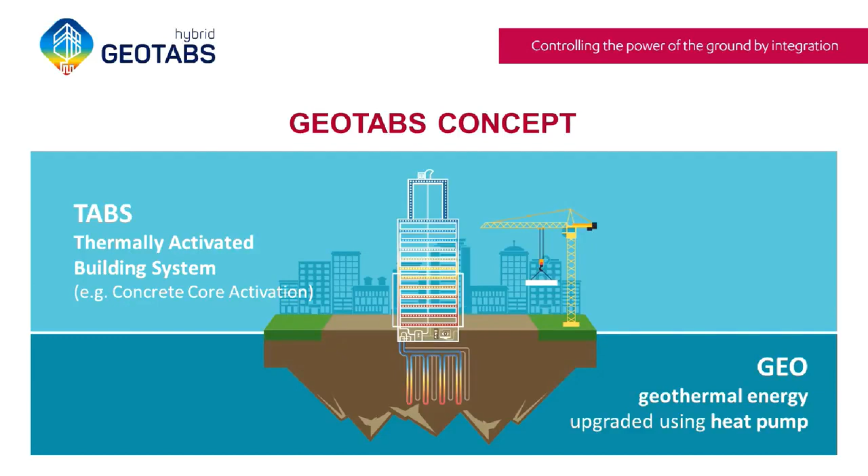To go a bit more in detail: at the moment there is heating demand in the building, cold heat will be taken from the underground, which is at a more or less stable temperature, and using a heat pump it will be upgraded to a higher temperature in order to heat the building at temperatures very close to comfort level, so temperatures between about 25 and 35 degrees.

In other moments, like in summertime when cooling is needed, the temperatures underground, being for example around 17 degrees, can be integrated into the building in a passive way, or if needed, active cooling can be introduced to lower the temperatures even further. But usually with passive cooling we can already do quite a lot.

The technology allows for seasonal storage of heat or cold into the ground, in which the ground serves as a heat source and/or heat sink. So in the winter, the cold is stored in the ground, which is then used in the summer. During summertime, the heat from the building is again stored in the ground to be used in wintertime.

The geoTABS technology already exists for quite some time and has quite some benefits. In terms of thermal comfort, for example, TABS is a radiant heating and cooling system, which is very nice for having high thermal comfort. Also, because we use the thermal mass of the building, we can store quite some heat to reduce, for example, peak loads.

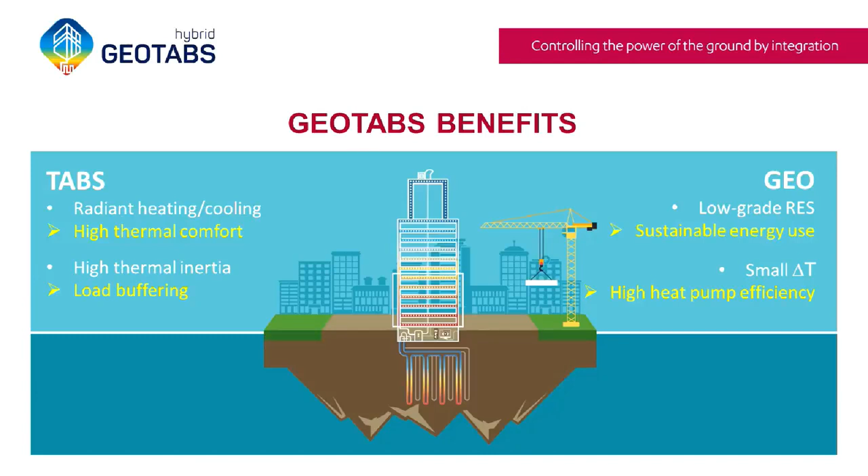However, there are of course a number of challenges, otherwise we would not be here today. Challenges with regard to the geoTABS concept. On the side of TABS, the high thermal inertia of a TABS floor makes it difficult to reach comfort in moments where there's a sudden increase in heating or cooling demand, because, for example, the sun hits the building or many people come into a room, which might suddenly increase heating or cooling demand, and which cannot always be directly covered by the TABS.

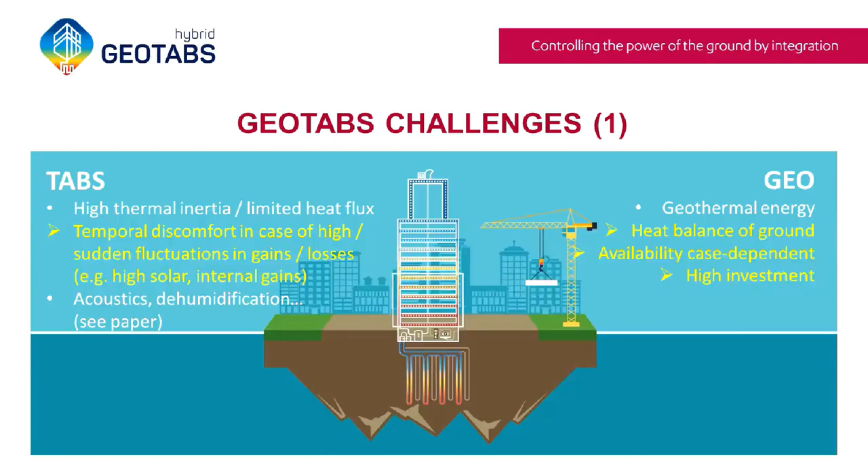A second aspect can also be with regard to acoustics or dehumidification.

On the geothermal energy part, there is of course the heat balance of the ground. In cases or buildings where there is a lot more heating or a lot more cooling demand, it's not always possible to balance the heat in the ground. So that's something that should be further looked at, and can also limit the number of cases in which geoTABS can be applied. Also, the availability of geothermal energy is case-dependent, and heat pumps are still quite a high investment.

Therefore, we have a first solution in the project, which is to combine the geoTABS with secondary systems, both on the emission side and the production side. So that is why we call the project hybrid geoTABS.

The hybrid solution in terms of emission systems can be to combine the TABS with other emission systems such as radiators, fan coil units, and so on. On the geothermal or production side, we can combine geothermal energy with classical non-renewable or with renewable resources to assist in heat production where needed.

For example, to reach a better balance in the ground every year, or to reduce investment costs, so that we can use the geoTABS at the point where it is most interesting and most efficient to use, and cover the remaining demand with, for example, less expensive energy sources.

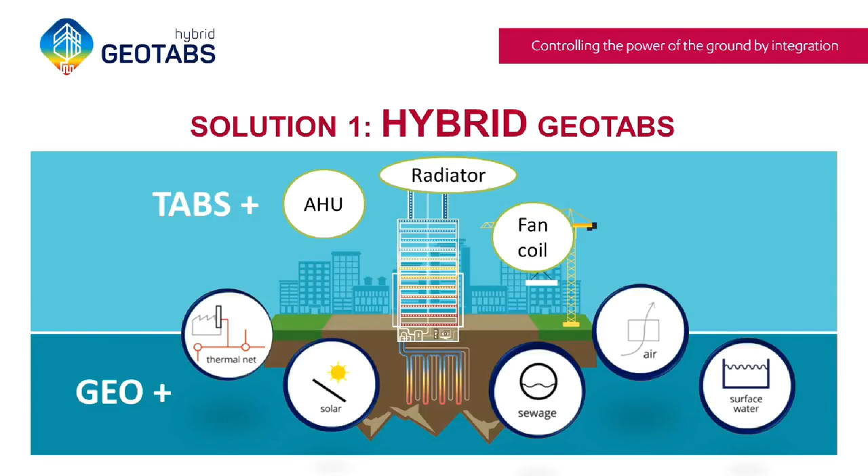Of course, this integration with secondary systems into a hybrid concept brings along a number of extra challenges. One of them is related to the control of the building, which will be the topic of the remainder of today. Traditional control of buildings is usually based on rule-based control. However, when we come into a building that is quite complicated with integration of various systems, it becomes more and more difficult and time-consuming to design and develop these controls, and to have them working decently.

On the other hand, we have the solution of using model predictive control, but also there quite some developments need to be made. But that is of course the further topic of today.

Also on the level of the design of such a building, there are still quite a number of challenges. For example, today it is often based on the personal experience of some experts who are designing these projects, these buildings. So an optimal balance between the geoTABS system and the secondary system is still a question we are working towards.

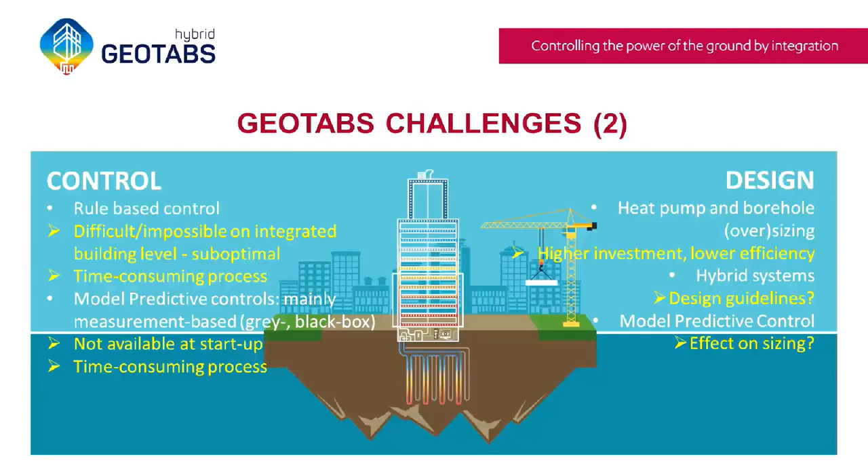Of course, the control of the building might also have an effect on the sizing of the components, so we should also take that into account. A second solution, therefore, in the project is the further development of model predictive controls to use in hybrid geoTABS buildings.

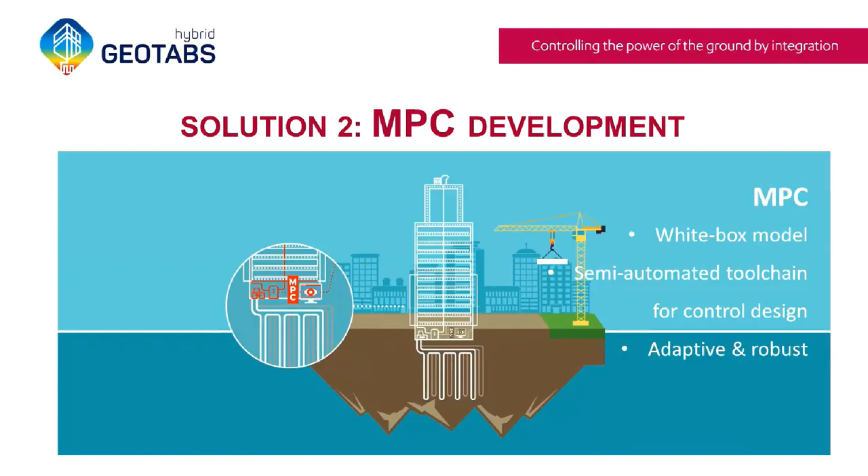A third solution is then about the integrated design of the concept, in which we take into account the geoTABS and secondary systems and also the effect of the control. The goal or aim there is to have a more optimal sizing of the concept and to provide easy-to-use guidelines or design methods that can be applied by engineers, architects, and a wider public in the future, so that we can avoid a lot of time-consuming studies with dynamic simulations and so on.

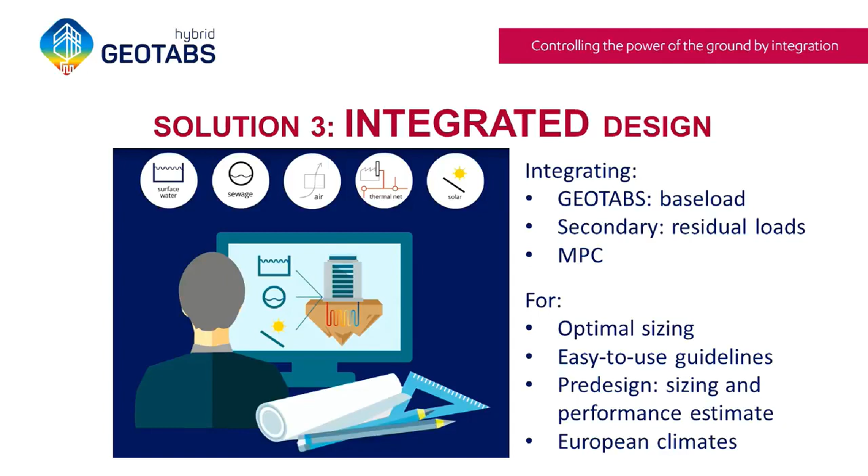So all these challenges brought a number of people together in this project, which we call Hybrid Geotabs. The long name of the project is Model Predictive Control and Innovative System Integration of Geotabs in Hybrid Low-Grade Thermal Energy Systems, so Hybrid MPC Geotabs.

In the consortium, it's quite important to mention, we have a mix of academic partners, small and medium-sized enterprise partners, and also some industrial partners.

Then we have a number of two design institutes involved: Boydens Engineering from Belgium and Lemon Consult from Switzerland. We have Geother, experienced in geothermal energy use from Spain, and two larger industrial partners being Viessmann and Uponor, who are also here today.

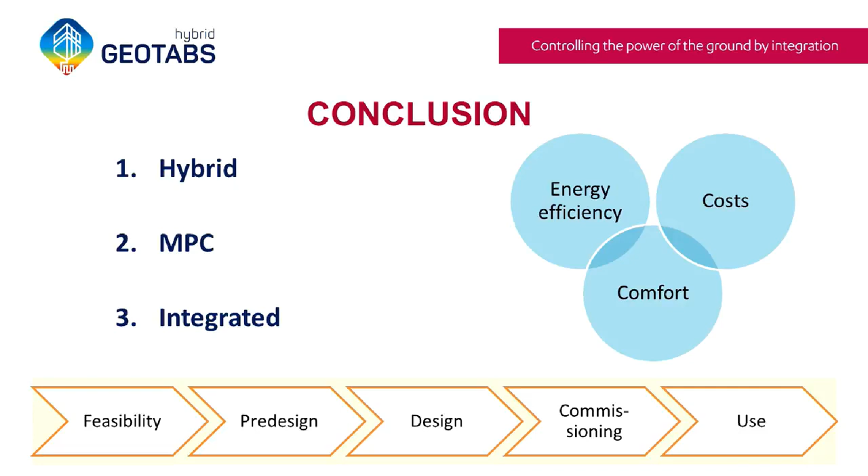And we are looking towards this in the feasibility, pre-design, design, commissioning, and use stage of the building. With this short introduction, I will give the floor to the next speaker, and via social media and our website, you can of course find much more information about the project.

Thank you very much, Eline. And...

Now is the time for Damien Picard of KU Leuven, who will give us a brief introduction on how MPC works and what it is about. Damien has been working quite a few years on MPC control now, so he's the best person here to give us the introduction to MPC. So, Damien, the floor is yours.

Thank you, I will start with putting my own presentation on. What does that mean? It's maybe already open, yeah. I should work on my slide skills, but...

Good morning, everyone. I have the pleasure today to introduce you to the concept of model predictive control. After my presentation, Philippe, Joris, and normally Jerry, but you, Jan, will give a presentation on the practical aspect, how we implement it in real buildings.

I will try to keep my presentation sufficiently short, so that you can ask whatever questions you want, but keep in mind that if you have real questions about the practical aspect of it, it's maybe better to wait for the next presentation so that you have the total view. And before I start, I would like to know who has...

...been working on designing buildings and HVAC systems in the room? And who has been working on designing control for HVAC systems and buildings? Okay.

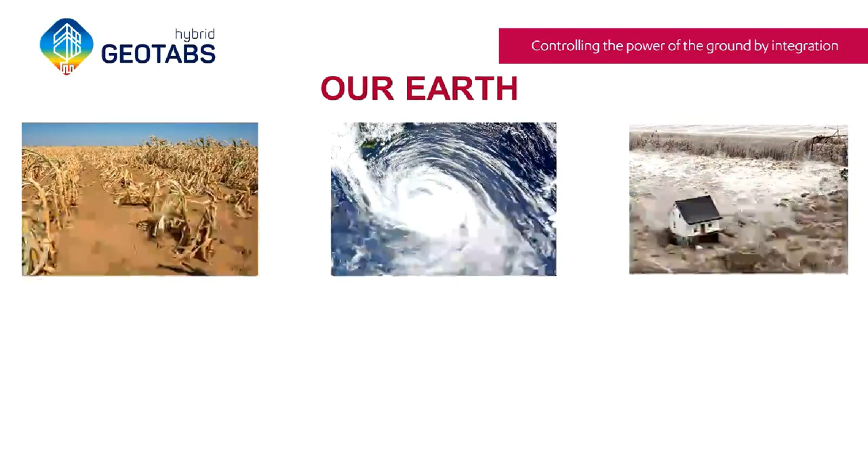I just want to show you a couple of disasters when the Earth is not reacting as we want it to. For example, if it's not raining, we have big troubles getting food. When there's a tornado or a flood, it's extremely destructive. So when Earth is not kind to us, we are in big trouble.

But the problem is that we are not very kind to the Earth either. It's a fact that global warming is happening fast, and we're facing a huge challenge to keep the temperature rise under 1.5 degrees by 2050. So politics is working on these numbers - it's pretty short time, and there's a lot of actions which need to be done and which are partially being done.

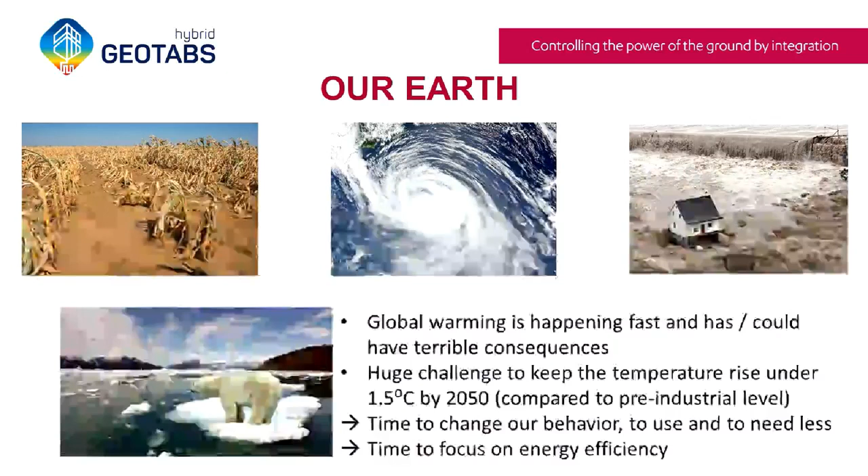So with this, as you all know, it's time to change our behavior, to change our use, to use and need less, and it's time to focus on energy efficiency.

What's quite interesting is that the building sector, as you may know, is using a tremendous amount of energy. According to the report of the International Energy Agency and International Partnership for Energy Efficiency Cooperation, the building sector uses worldwide 120 exajoules, which is about 30% of the total energy consumption of all sectors of the economy. This is a very substantial number, and it's also responsible for 30% of global CO2 emissions.

The report also makes some speculation that if we apply now the most efficient system to all existing buildings, we could save roughly 50% of the energy used by the building sector.

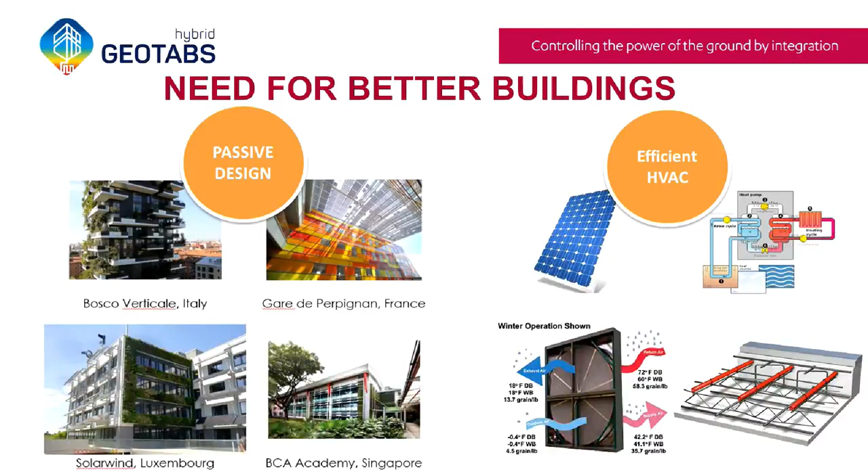While my colleague Filip Jorissen was doing his PhD, trying to model all that and implement all the rule-based control, he ended up with a book of 400 pages describing how the control works. Just because it's so complex to put all these different systems into rules and to try to optimize the way they interact, it's a very work-intensive task. You always end up with a suboptimal solution, which needs a lot of commissioning. What's also important is that it's very difficult to get a general framework that you can apply to all buildings. So you always have a lot of engineering to make it, and then a lot of engineering to commission it and tune it until you achieve good comfort and good energy.

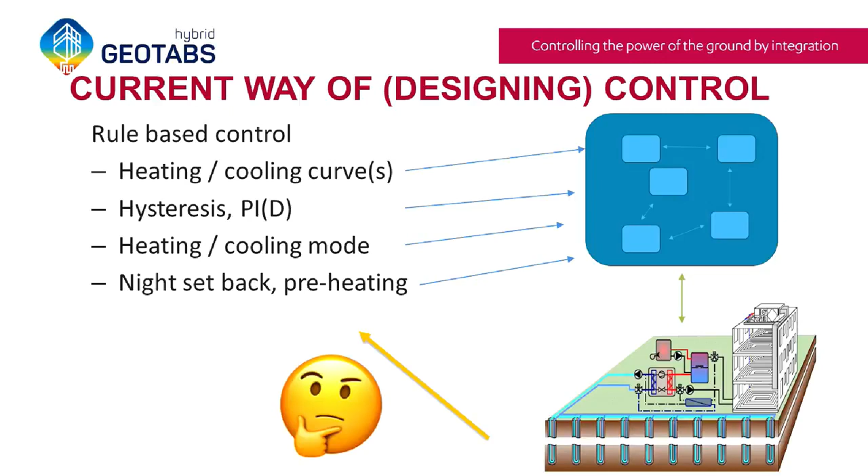So most probably the way of the future is not anymore to try to, by hand, define all the different rules and all the different interactions into software, but much more trying to create a software where we can give the general physics of the building, which type of HVAC is present in the building and which type of building it is, which type of occupancy there is, which type of schedule, which type of internal gains which are being expected, and solar gains. We put this more physical information into the software, and the software is going to automatically set up which type of control signals needs to be sent to the different machines, and the software is going to take itself into account the connections between these different systems.

There's a really upcoming technology which is now everywhere: the optimization possibilities of the computer. The computer will then have to optimize how we can get as much comfort into the building and how we can use as little energy as possible. So this project is working on this with model predictive control. And I would like to introduce more what's our vision about this and how we implement it.

When we speak about computers starting to optimize and think, a keyword everybody has heard before is artificial intelligence. This is really an upcoming technology which is also taking a role in HVAC. If you think about the Nest thermostat, for example, this is artificial intelligence, but there are a lot of other aspects. I'd like to first introduce it with the Google car example to show you the key elements of artificial intelligence, meaning in a broad scope that the computer starts thinking and optimizing in order to control a system.

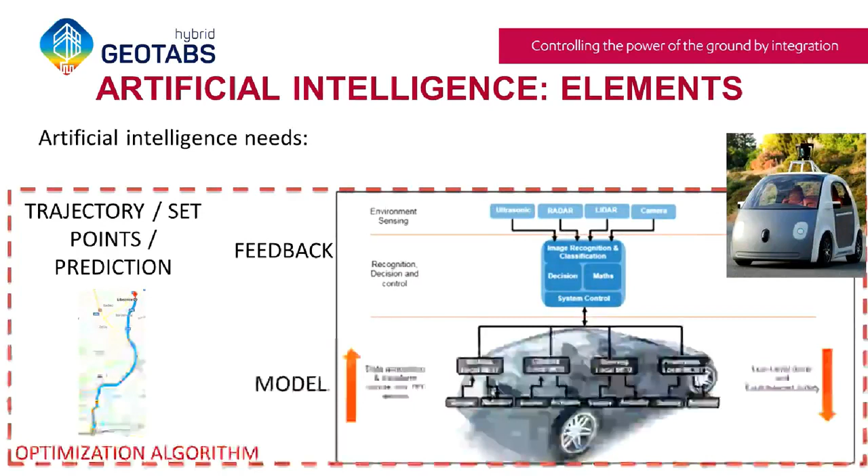All three elements — the trajectory, the model, and the feedback — are included into an optimization algorithm, which will then try to get things done as efficiently as possible. In the case of the car, that means getting from point A to point B as fast as possible, while ensuring good comfort and, mostly, ensuring security.

Let's focus a little on the model, because this is a really key element. In literature and in practice, model generation is categorized into three types. The first one is a black box model. A black box model is something where you measure the actions you put in, for example the throttle and the steer angle of the car, and you measure at the same time the resulting speed and direction, and then you create a mathematical model based on this measurement to find a connection between throttle and speed, and steer angle and direction.

So you do not need to apply any physics into this — think of it as a regression curve, for example, or another type of model. It can also be a neural network if you're really into artificial intelligence. It can be whatever. What's important is that you need measurement data of your system, and then by applying some mathematical tricks on it, you'll be able to predict more or less how your system behaves. Another way of doing it is to say, well, I have an idea how my system looks like.

So I know that I have a steering wheel, and that the throttle is connected to the engine, so there's a clear connection between speed and throttle. You put this information already into your mathematical model, and you only optimize the parameters of this model based on measurements. So let's say you have a general idea how the car is working, but your model is not yet fitted to that specific car. Then you measure throttle, steering wheel, speed, and direction, and start optimizing the parameters of the model so it fits that car. That's called a gray box approach.

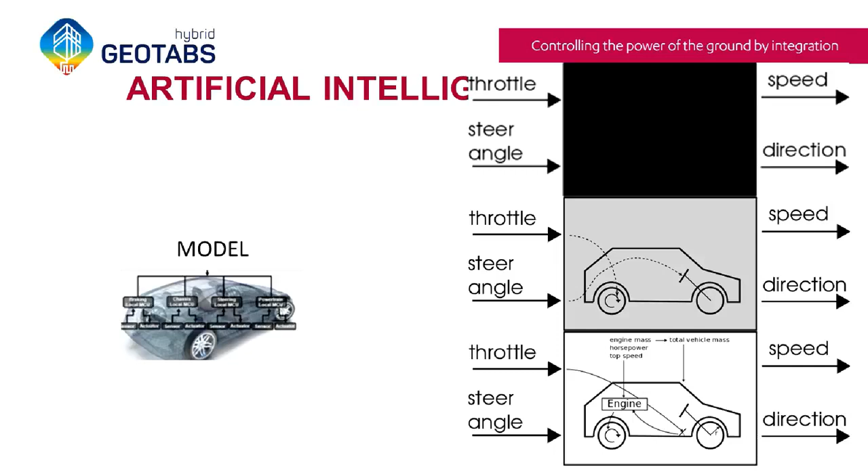Now the second aspect I want to focus on before we move to buildings is the optimization algorithm. There are some important keywords. First is objective: what you want to achieve with your optimization. For the car, I've said it's minimum time, minimum fuel, and maximum comfort. Then there's the optimization variable: what are you actually controlling? For the car, it might be the throttle, the steering wheel, brakes, and the road you choose, for example from where we are now to Liberec. Then you have constraints: you want to stay safe, there are speed limits, there are other road users. And finally there's prediction, so you may account for a traffic jam or a traffic light. These are all very important keywords for optimization algorithms and artificial intelligence.

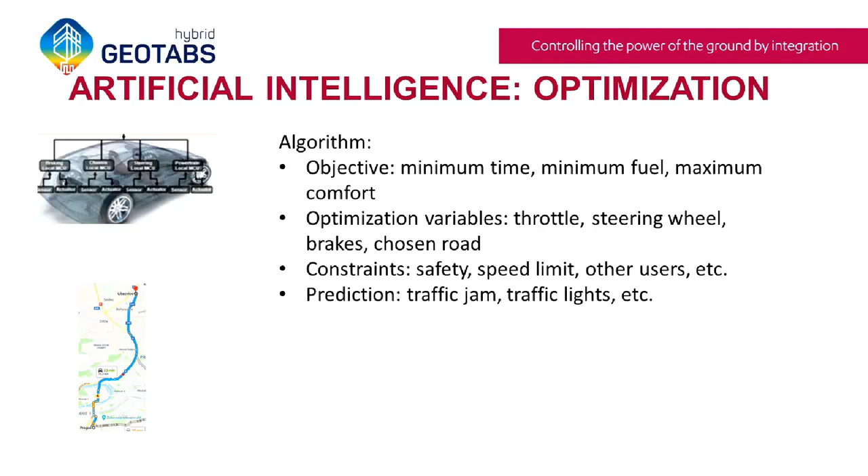And now we are going to dig into a special aspect of artificial intelligence, which is called MPC, Model Predictive Control.

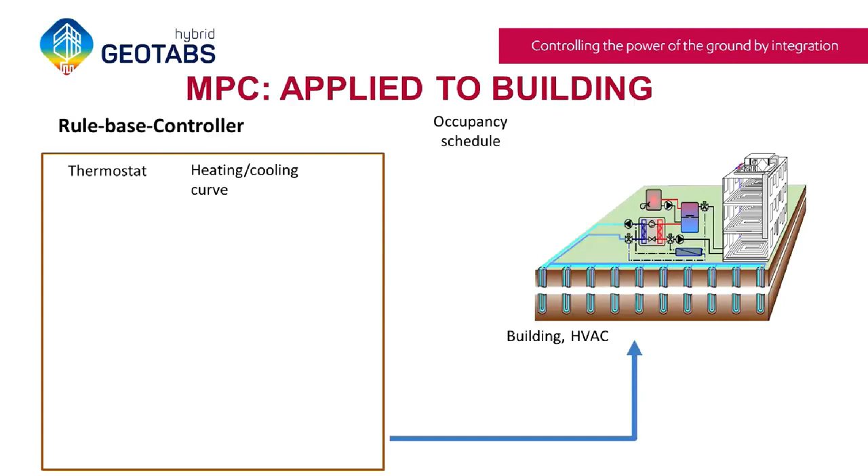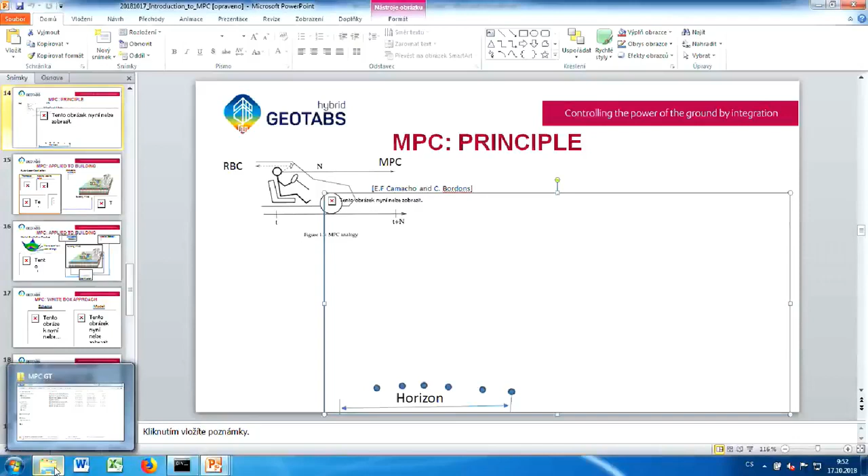So I still want to show you this picture... it's not there. What does it mean? It's not visible. How can you make it visible? I don't know, there's a mistake. No problem, there will be one picture less in the slides, but I think we'll manage. How about I just connect my computer?

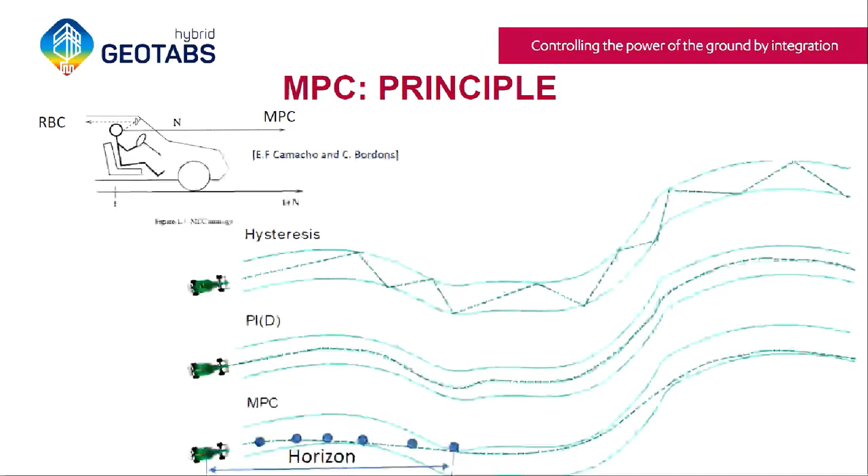But MPC is just going to look ahead with what's called the horizon. So for example, that was my 50 meters, and it's going to project itself and see, okay, I should just stay within these two lines and optimize. What's interesting is when the car reaches this position, it's going to reevaluate again what it should do until here. So I hope this makes clear how MPC works.

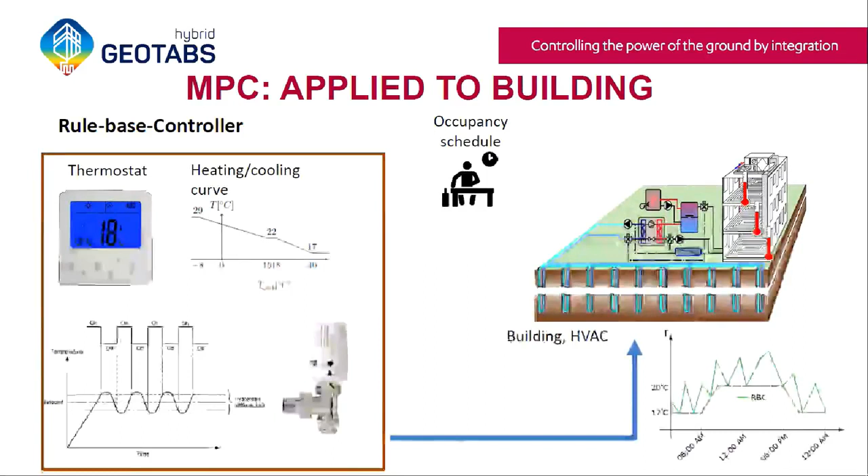Imagine you have a building now. If you have a rule-based controller, you may have a thermostat, a heating curve, and also a thermostatic valve for the radiator. Again, you are going to oscillate around your set point - the thermostat turns the system off or on, and you oscillate between different temperatures. This doesn't look like the best way to control your building, especially once you have lots of different machines that need to modulate and interact correctly with each other.

If we look now at how MPC would work, we first need a model of the building to predict how fast it can be heated up and how fast it cools down. We also need some weather forecast, so we know how much solar gain is coming, and together with the building model, guess what the temperature rise in the building will be.

We also need an occupancy forecast, firstly to know when people will be in the building, so when does it need to be warm. But also because in modern buildings, internal gains are a major source of heat, and then you may need to cool the building down. If you put all this information into your optimization algorithm, you get a curve which is multidimensional - here I'll show a two-dimensional curve - where there's probably one point where you use the least energy and still get all the comfort required.

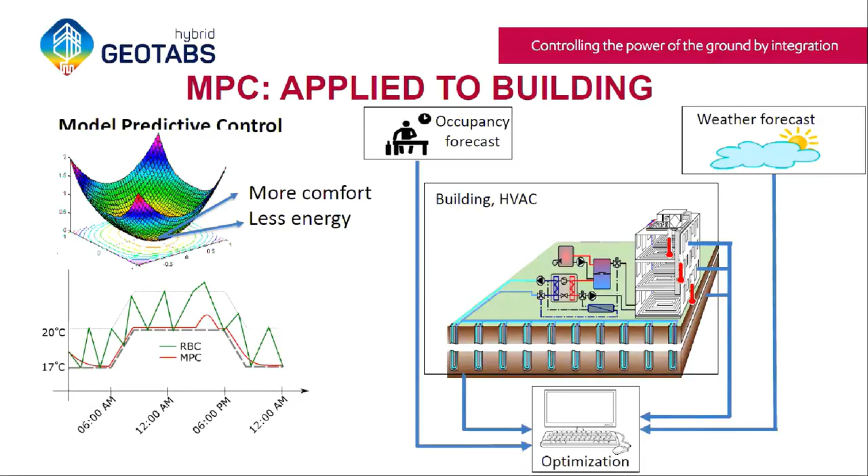All right, so that was the idea. Now, how does it work in practice?

The way we are doing it in this project is mostly white box, so we do not use so much measurement data to make models, but we use physical equations to make the model. We try to have a one-to-one mapping between reality and our model. In the project, our Czech partner is also using a gray box approach, so we are actually using two approaches.

The parameters we then have to give are valve characteristics, heat pump characteristics, pump characteristics, pressure drops in the system. If we know all this, we can give this information to MPC, and MPC can optimize down to each component, so it can optimize the actual opening of a valve, taking into account not only the effect on the COP of the heat pump because the temperature is going to be different, but also the pressure drop of the pump. So again, here we can optimize not only the heat pump, but the heat pump in combination with the circulation pump.

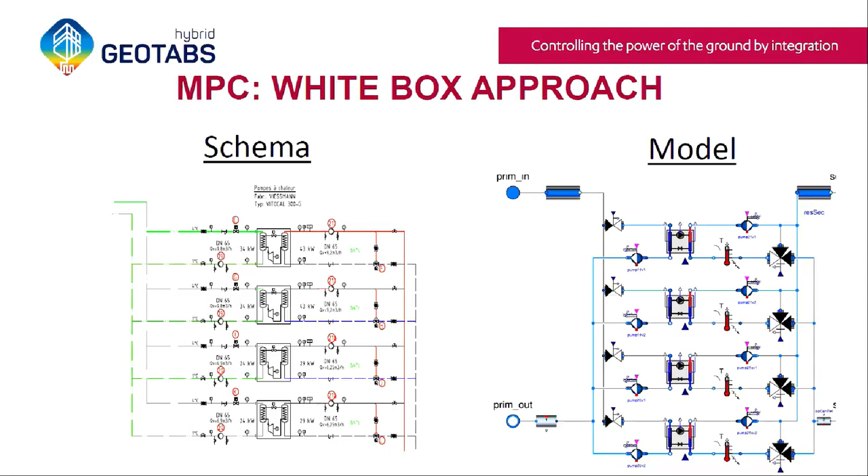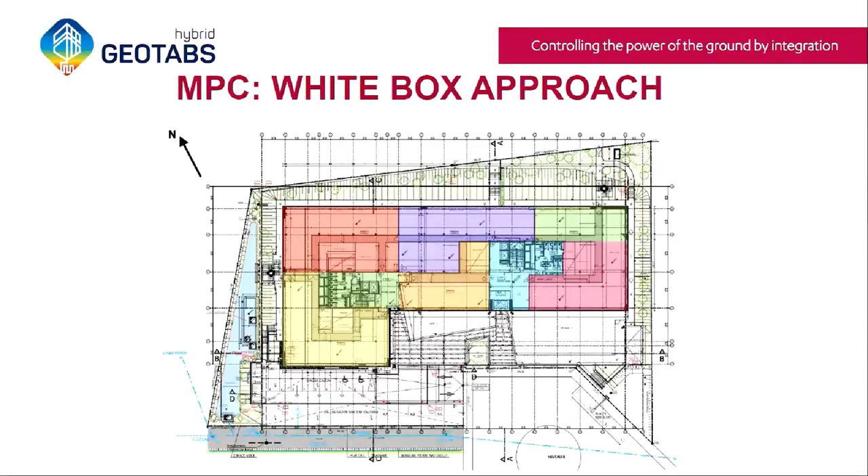So that was the HVAC. Now, if we are modeling the building, we are going to divide the building into different zones, and then we can optimize the temperature of each zone. Typically, the zones will coincide with the HVAC zones that have been defined before.

So what we are optimizing, as I've said, we can optimize valve and damper positions, pump and fan speeds, and set points.

What MPC is really strong in is avoiding the destruction of energy. For example, if one side of your building needs heating and the other side needs cooling, and hydraulically it's possible to bring energy from one side to the other, that's something MPC is always going to do. It's also going to check, if you have floor heating and ventilation, that there isn't one heating while the other is cooling, except if it's truly optimal, which might be the case, but is often not.

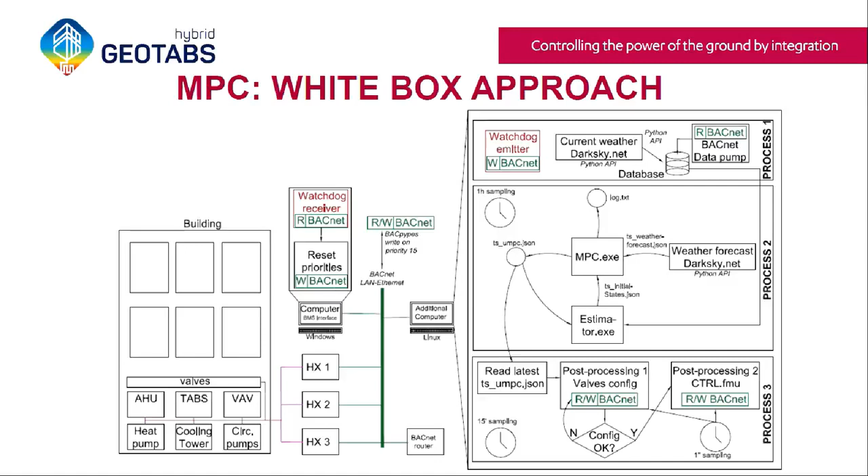My colleague is going to give more information about the practical implementation, how we apply MPC into the building. Our approach is not to change anything from the original building management system, but just to be able to override some set points with our algorithm.

With this, I would like to conclude that there are a couple of companies already applying it. One of the companies, Energo Cluster, is also a partner in the project. But I think the biggest player is Johnson Controls. They've applied MPC to the Stanford University campus. That's a very big campus, a 50 megawatt gas-fired plant with cogeneration.

They have been running it for a couple of years now, and they have achieved 10 to 15% of additional savings compared to the best building manager, what they could achieve in the building. So these are really substantial energy savings, and their system can also work for a very, very large campus, which is also interesting.

One of the case studies is SolarWind, as I've mentioned, and this has also been investigated in the PhD of Filip Jorissen. In simulation environments, it could save 82% of energy compared to the RBC case. This is, of course, an overestimation because the simulation environment does not include all aspects of the building, but we are strongly hoping to achieve 50% energy savings in that building by applying MPC.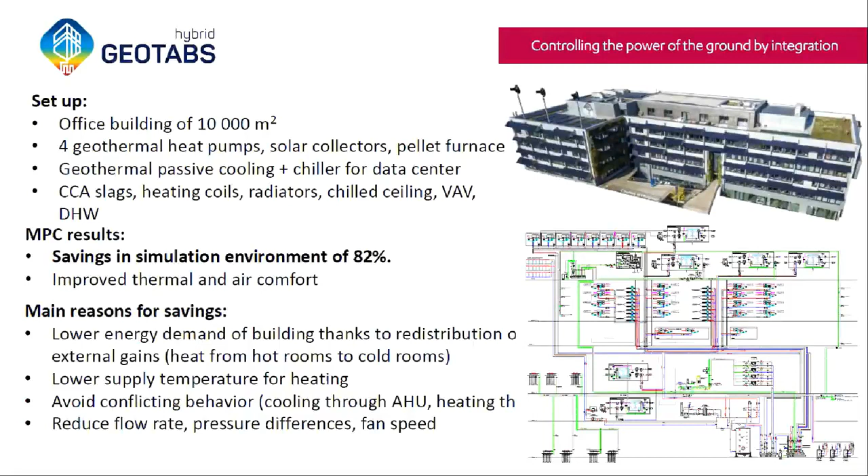Then there are other companies like Building IQ, which is mostly based in Australia and America. There's Johnson Controls, who have a team of 40 people working exclusively on MPC. And then there's a set of other companies also working on MPC.

So it's, to me, pretty obvious that optimal control is going to come to buildings. It's not obvious in which format it's going to come, whether it's going to use white box, gray box, or black box. And it's also not very obvious if this will happen in 5 years or 10 years, but it's very obvious that it will save us time to apply this type of technology, and it will save us energy. So I strongly believe this will come, and we are working on this project, applying it to real buildings with our approach, to contribute to that general effort.

With this, I would like to thank you, and if there are any questions, you may ask them, but remember that you can also write them down and discuss them during the debates after the next two presentations. Thank you.

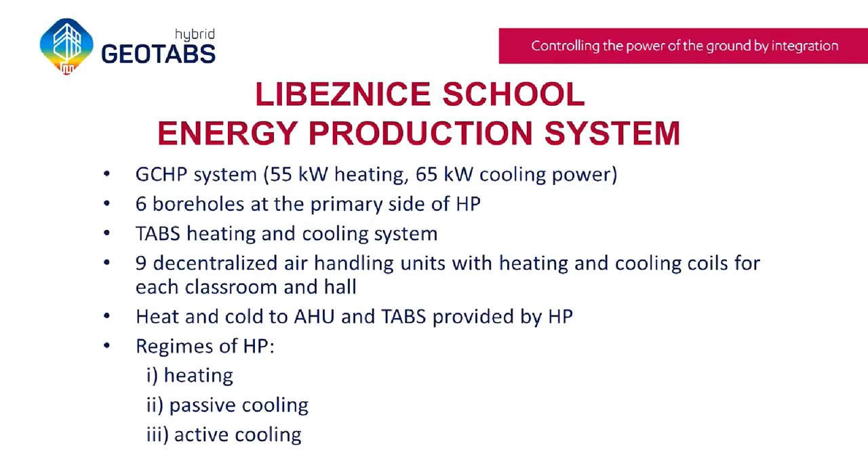There is a TABS system for heating and cooling, and also 9 decentralized air handling units for each classroom and the multifunctional hall. The air handling units also have heating and cooling coils. The heat and cold for the air handling units and for TABS is provided by the heat pump. The heat pump can be operated in 3 modes: the first is heating, the second passive cooling, and the last active cooling. I will explain the modes in the following scheme.

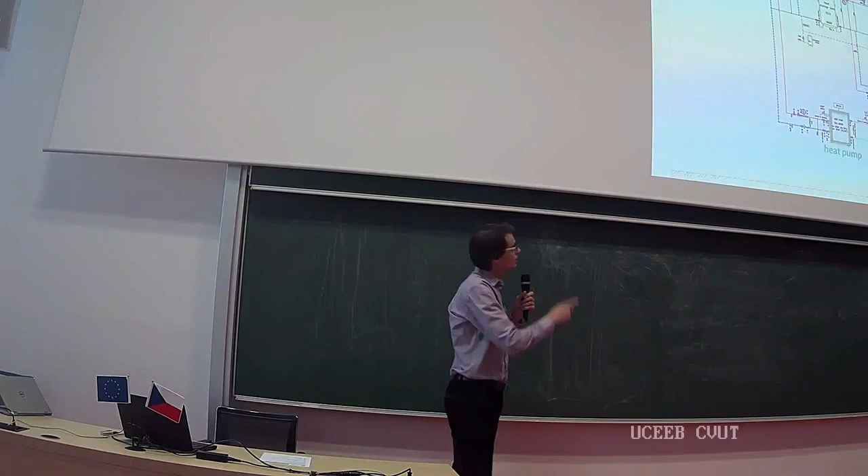It is a little bit confusing, but I will emphasize the important elements. So there is a heat pump, and there is a bore field. If the heat pump is working in heat mode, it takes heat from the ground and, due to the compressor work, produces much more heat at the secondary side.

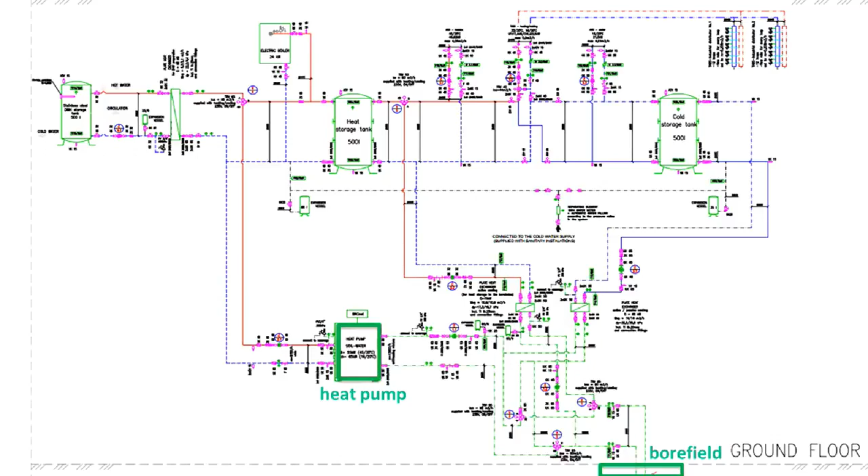It can provide heat either to the domestic hot water tank or to the heat storage tank. From the heat storage tank, the heat can be further distributed to the TABS circle or to the air handling unit circle.

If the heat pump is operated in passive cooling mode, the cold is taken from the boreholes, and without any compressor work of the heat pump, it is distributed to the cold storage tank. From the cold storage tank, it is further distributed to the air handling unit circle or again to the TABS circle.

The heat pump can also be operated in active cooling mode. It means that the cold is taken from the bore field to the primary side of the heat pump, and the surplus heat from the storage tank is sent to the ground again, or stored in the ground. I hope that it is clear. You will see it in the afternoon.

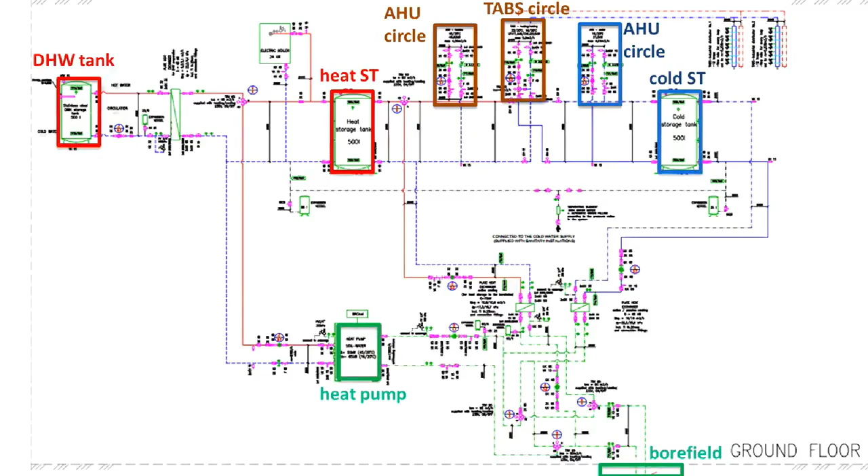So now I will talk about the previous MPC implementation. In the previous MPC implementation, MPC controlled only the set points for supply water temperature of TABS. It didn't control air handling units. So the objective was to minimize thermal comfort violation, meaning to keep the set points in classrooms, and to minimize energy for the TABS system.

The mathematical model for MPC was the gray box model and was very simple. It had only two states. The first state was the average temperature in the whole building, so one temperature for all classes and the multifunctional hall.

And the second state was the TABS temperature, meaning the concrete temperature. The MPC predicts the following disturbances: occupancy in classrooms and the hall, the ambient temperature, and solar gains in all directions.

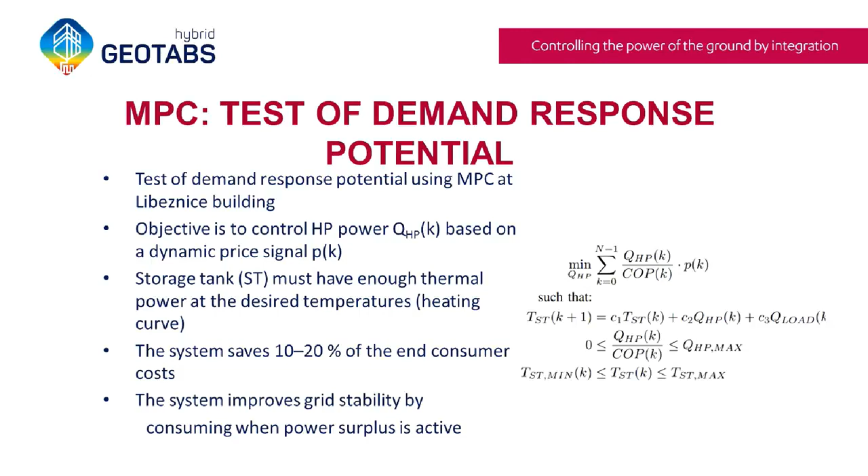Now I will talk about the new MPC implementation. As I said, it's only been 2 days in operation, so we don't have so many results, but it works. We will discuss it with Jiří also during the afternoon.

This MPC implementation includes control of both the TABS system and air handling units. It considers the model of temperature in each classroom and in the hall, and also the model of CO2 concentration. It's a dynamic gray box model based on a resistance-capacitance model.

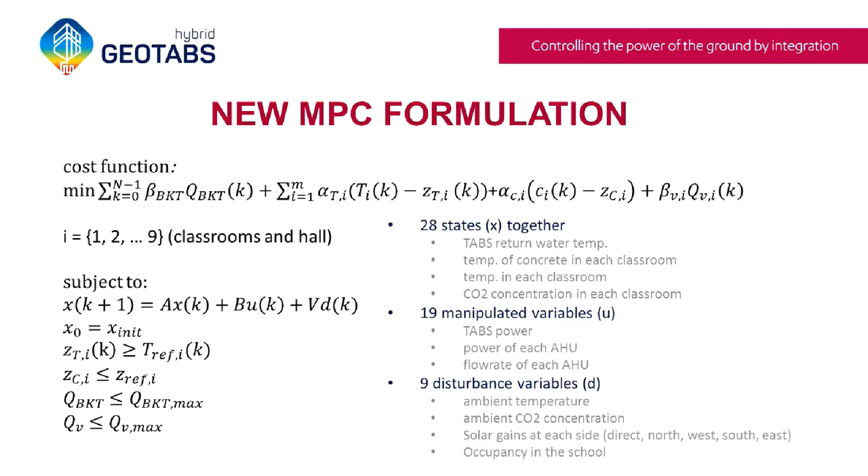As I said, it is a discrete time dynamic model. The control period is 20 minutes. The prediction horizon is now 24 hours, which means 72 steps.

MPC is implemented as a cloud service in Python and communicates with the PLC at Líbeznice through some protocols, a soft PLC proxy. The historical operational data are stored in a database, and we can supervise them through the Mervis SCADA interface, thanks to Honza Široký.

The future work will be the refinement of the mathematical model and extension also to the cooling model.

I would like to thank all project members, Lukáš and Jiří as project leaders, and thanks to Eugenii and also my colleague David Charvát, who implemented the MPC in the real operation in Python.

And Lukáš wanted also to talk about the Blanka Tunnel complex, if I have time. Before lunch, okay. Because it's our largest project, and we will go through the Blanka Tunnel during the guided tour. So, okay.

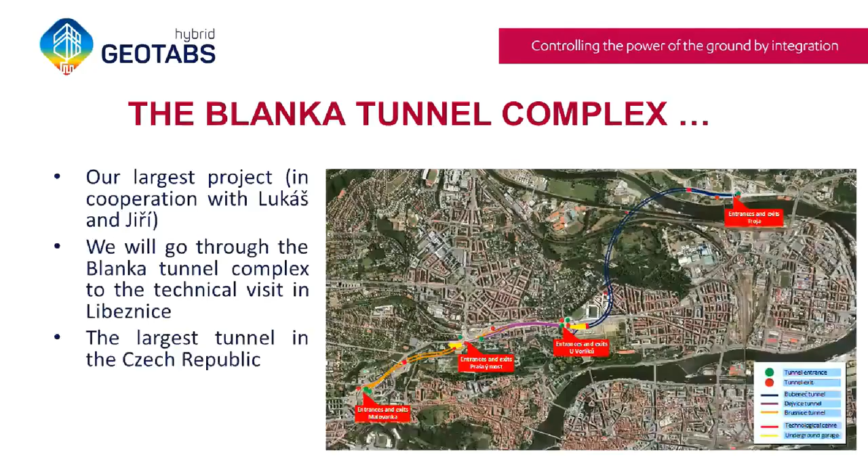So thank you for your attention and questions during the discussion.

Thank you very much. And now the floor is for Filip Jorissen, sorry, from KU Leuven, who will give us a presentation on another case study in the project, the Infrax building, where the headquarters offices of Studiebureau Boydens reside. Is that correct pronunciation? Studiebureau Boydens. So, Filip.

Thank you. So as announced already, we're in a project where we have several demonstration cases, and we have two methodologies essentially for applying MPC. What Jan just presented was what we call the gray box approach, as Damien explained, and we're looking into 3 more cases which use a white box approach, and that's what I'm going to cover. I'll go into a bit more detail on the first of them, which is the Infrax building in Brussels.

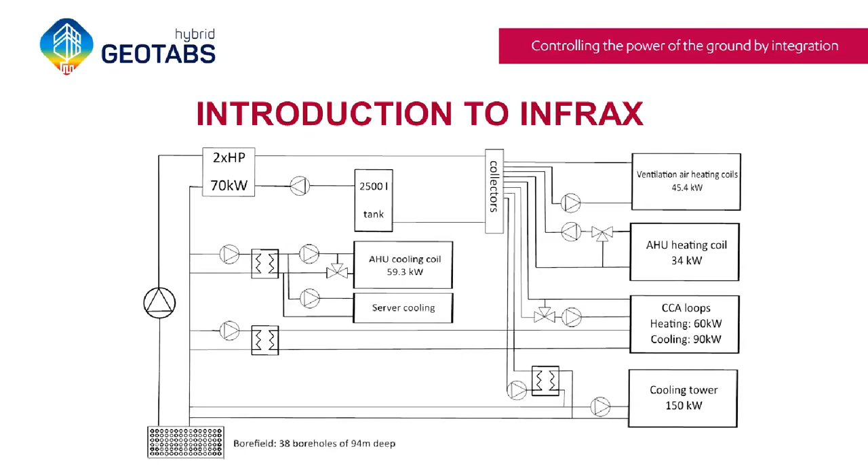And we have smaller individual heating coils for the VAVs inside of the building itself. And then finally, we also have a backup cooling coil, cooling tower for additional cooling if needed.

So the building is currently controlled using a rule-based controller. It's a system of Priva. They have these graphical interfaces that look like this. It's very convenient for making adjustments.

And it's controlled over a BACnet interface. So as Damien already explained, that's the interface we try to hook up into. We write directly on the BACnet layer to override the existing control signals. And that means we also have a fail-safe in case of problems, so we can fall back to the existing rule-based controller implementation.

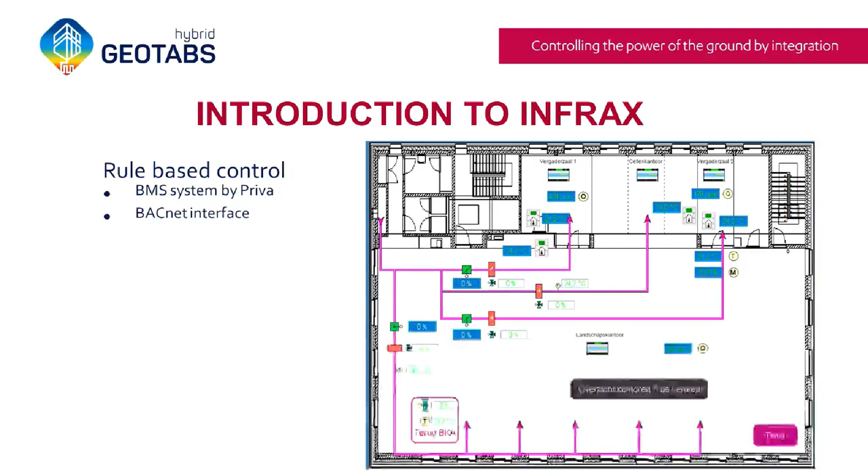So the white box modeling approach has been explained partly already by Damien. In this, I'm going to explain what this means for this particular case study.

Model predictive control is optimization based. It means that we're optimizing a specific model that controls the building, and it's a model specifically for that building. So for each building, we have to make a separate model, what we call a controller model. And of course, what we try to do is make this as easy as possible, to lower the complexity, because we don't want everyone to have a PhD in optimization to be able to make one of these controllers.

And that's essentially what the whole white box approach is about, that we try to automate as much as possible this MPC model development. And therefore we have set up this methodology, which you can read more about in this beautiful book over here.

So the methodology essentially consists of 3 parts. Firstly, it's all using Modelica, and the first part is essentially using Modelica libraries. We have made a bunch of libraries called IDEAS, and also the IBPSA library, which is an international collaboration.

These libraries are essentially like a real library where you have books, but we have models on the shelves. These models are, for instance, a heat pump model, a pipe model, a pump model, a fan model, and things like that. The idea is that you can just grab the models from those libraries, configure them with some basic properties like nominal flow rates, or a valve type, efficiency curves, COP curves, and then using those models, you can compose a building model.

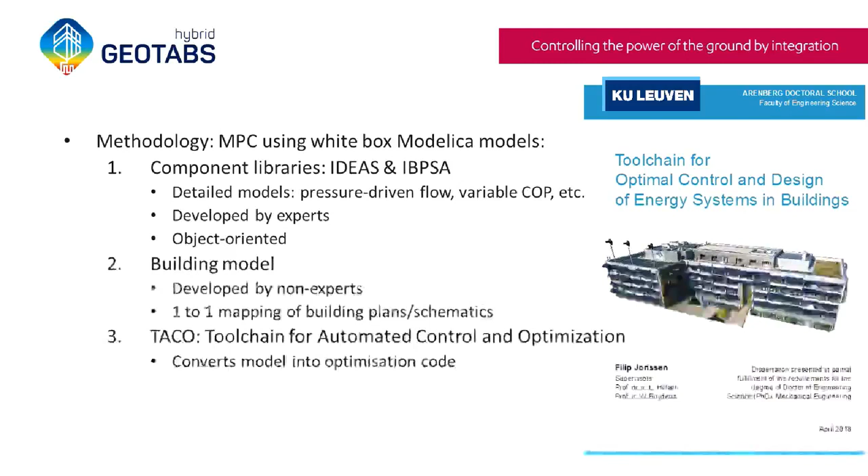Then in the third step, we take this model as an input, and we automatically transform it into an optimization code. So the idea is that we have this building model. Someone creates it using the known building geometry and HVAC design schematics that are available. Then you have this Modelica model.

We pass it through this tool chain - for automated control and optimization. And out comes an executable. The idea is that this process here is a once-through process. We do this only once, and then you have this executable.

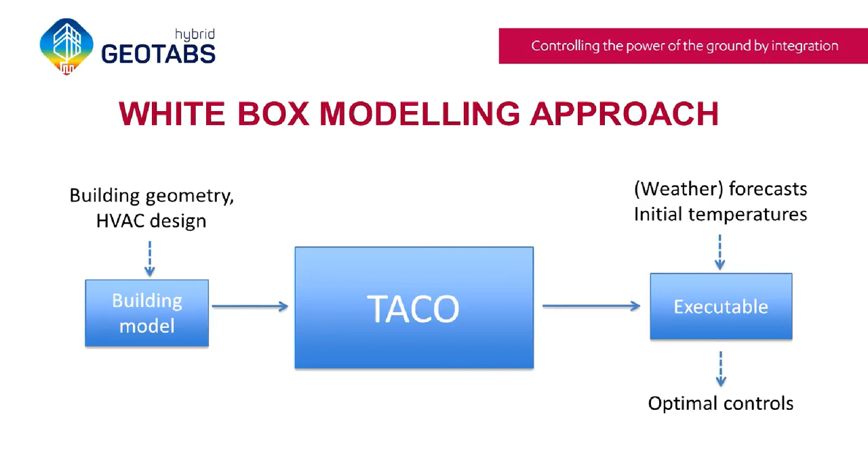That executable uses the initial temperature of the building and weather forecasts to compute optimal control variables. This is something we compute time and again, for instance every 20 minutes in Libeznice. In our case currently, we're using 1 hour. This then determines set points for optimal control, which are then tracked by lower level controllers.

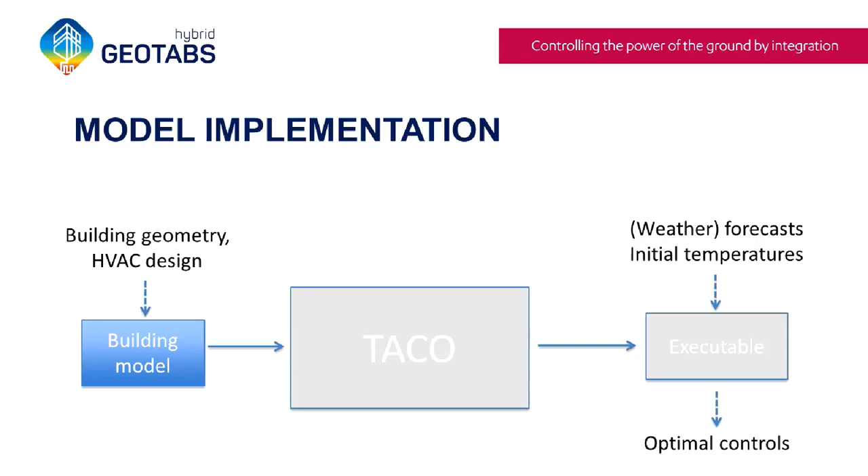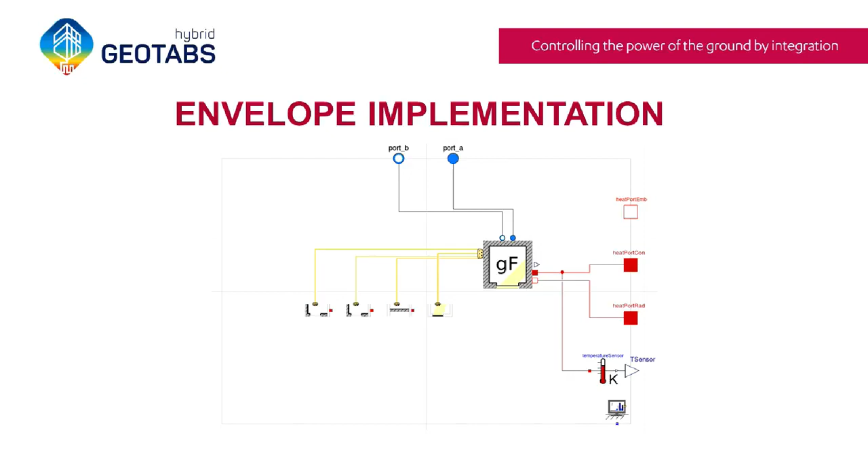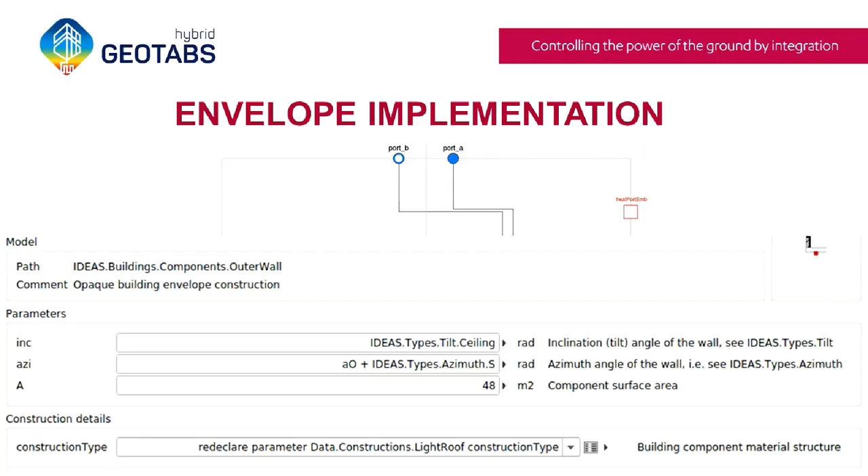Now in the case of Infrax, it looks like this. We didn't clean this up, and the idea isn't that this is super clear, but it's just to show that we split it up here also into 4 floors. And then for something separate, for instance a hallway that's spread over multiple floors, we put it separately. But this kind of workflow is something we want to automate further, such that this isn't something you have to deal with directly.

And then just to illustrate, this is one floor which contains more of these zones that are coupled together. That's the sort of objects we're working with. So the idea is that you have zones, you map them into these zones, and you have walls, which can also be mapped into a wall.

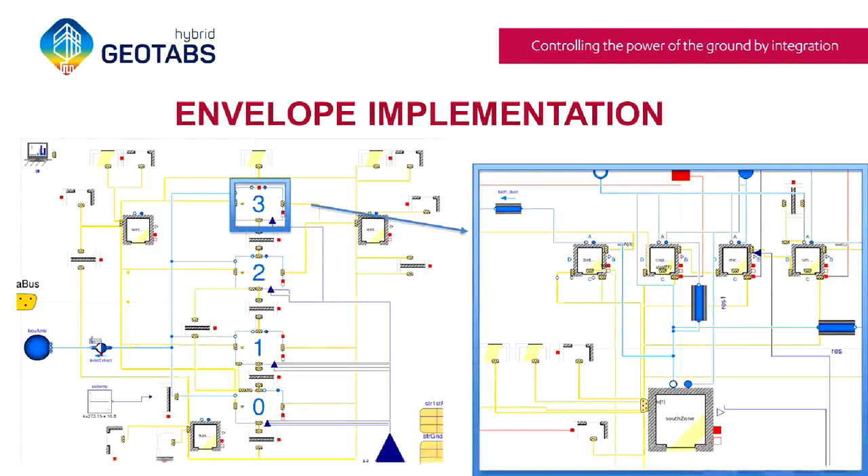So essentially the type of input parameters that we need with this approach are these things. We need surface areas of all walls, the orientation, the material layers and their thermal properties, although we have a default database for thermal properties. So essentially we just need to know what different layers are contained by a wall. Often it's the same for the entire building, so it's not too much work to piece this together.

The same thing for glazing type. Is it double glazing, triple glazing? What's the U value? Things like that. And then we also need to know the location and geometry of shading devices, such as surrounding trees, or like here outside you have this row of houses at a distance of about 50 meters. So it's this kind of information, quite general, that we currently need.

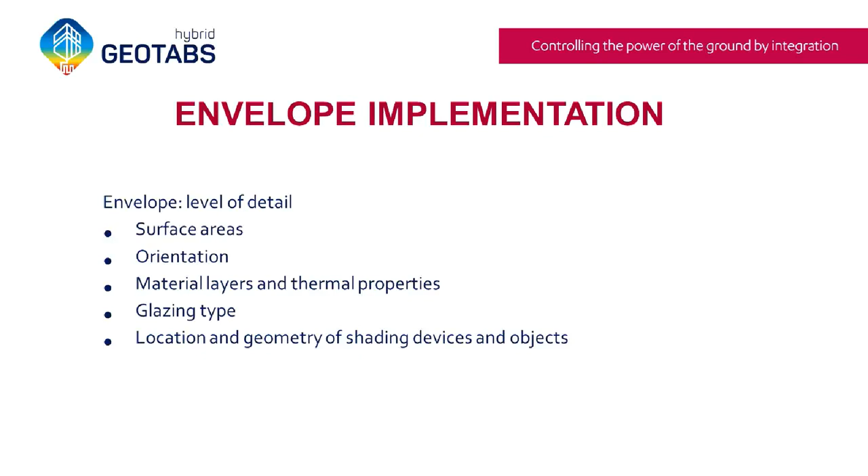Similarly for glazing, we have here a glazing system which consists of a glass layer of 4 millimeters, an argon air layer of 15 millimeters, and then another glass layer. And we have some transmission and absorption coefficients here. So all this information is taken into account to do the actual MPC modeling.

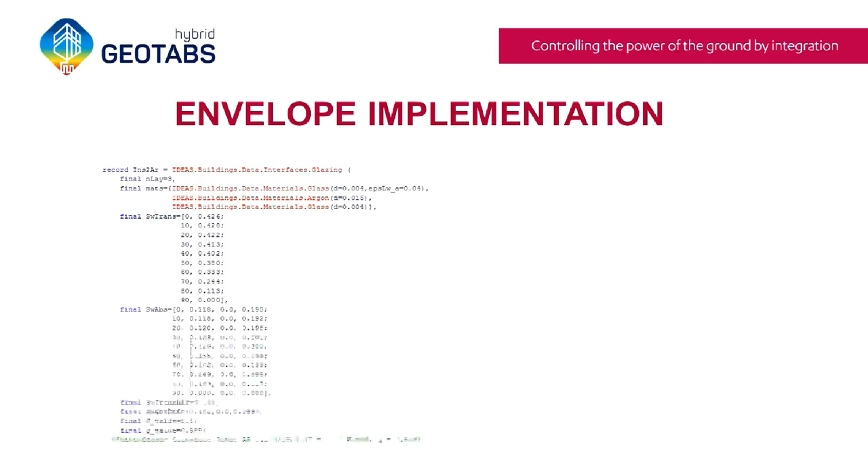Then to get back to the HVAC implementation, I already showed this graph. But just to repeat, we have here a bore field, 2 heat pumps, and then some things that are connected to that. So in Modelica, it looks like this. So this is the actual HVAC model that we're using. So this is a bore field. We have a pump here. This is a bypass I mentioned that wasn't on the other schematic.

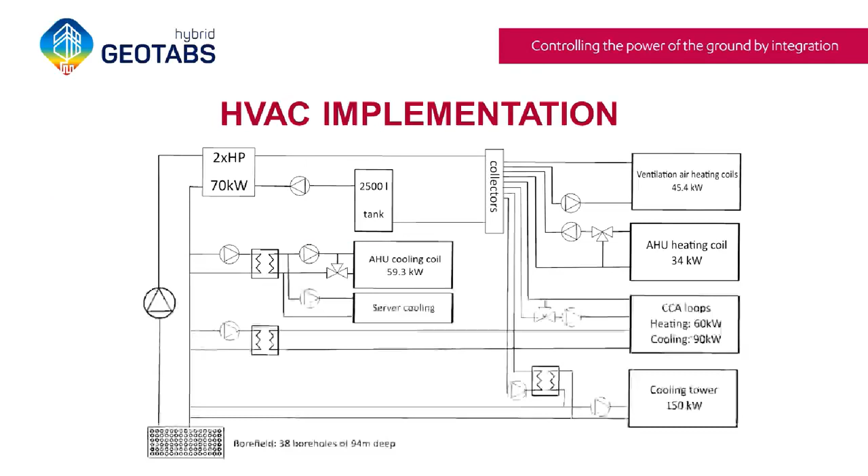We have a heat pump model here, and then a bunch of connections like heat exchangers. As it was shown here, you have 2 heat exchangers, 2 pumps. Okay, this is not on the next one, but so the idea is just to show you that it's even more clear for the building schematics that we're just doing this one-to-one mapping from a schematic into a model.

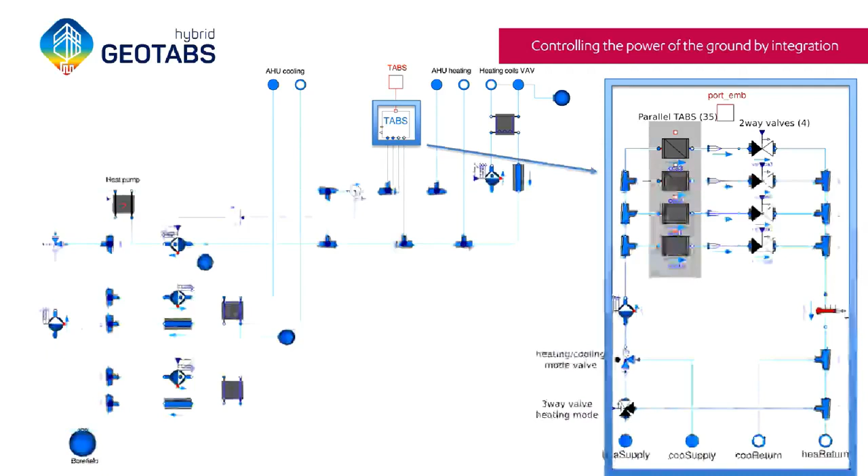And then here again, we have some more information about the concrete core activation. So for the 4 floors, we have 1 valve each that controls the flow rates for that floor, and 1 central pump and some valves for mixing between the heat and the cooling circuit, essentially. So based on this information and these hydraulic connections, the MPC is able to figure out what its control options are, and it then fully automatically computes what the optimal control settings are.

So now for the HVAC, what type of information do we actually need? The most important thing is, of course, what components do we have and how are they interconnected? And then other than that, it's pretty generic things like nominal flow rates and pressure drops, fan and pump curves at nominal speed, the valve types. So we have different types of valves.

For the concrete core activation, we need to know the spacing between the different pipes, the thickness of the pipes themselves, the diameter, and things like that. Also sensor locations, because we use feedback from sensors to correct our model. So now also with, for instance, a thermostat, you have some temperature measurement that you use to control heating and cooling. We also need those, and we need to know where they are located, more or less anyway.

For a heat pump, we need a performance map. So as a function of inlet temperatures, what is the COP of this heat pump? You can also use a fixed COP, but that will, of course, decrease the performance of your controller. For heat exchangers, also pretty generic things like nominal heat flow rates and mass flow rates, from which we compute a UA value of the heat exchanger, essentially. And we use that to compute how the heat exchanger works.

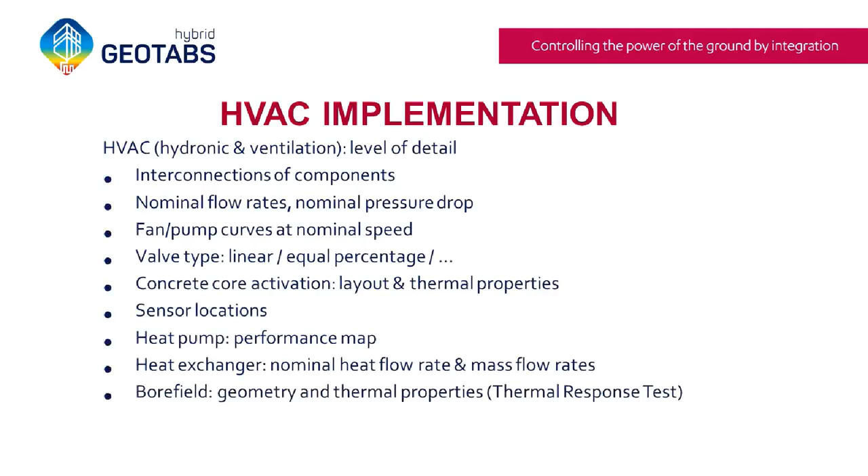And for the bore field, we need the geometry. So actually, that's something we're still working on, so maybe I shouldn't go into too much detail to avoid making wrong statements.

So in the second stage, we translate this model using the toolchain. It's a Modelica-based toolchain, since the models we use are also Modelica. It's based on the open source framework JModelica, and we made some custom modifications to generate much more efficient code than what the default JModelica implementation does. So it's tailored to building applications, which we are working on, and essentially we were able to deal with a lot more states. In our case, our model has 1,200 state variables, whereas the gray box approach typically has in the order of 20 state variables. So it's different orders of magnitude that we're talking about there.

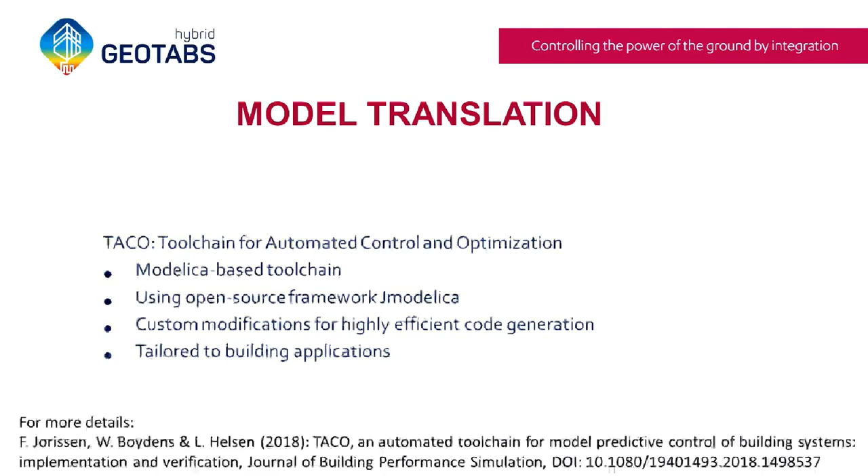Now, I'm not going to bore you with too much detail, but I just want to give you an idea of what makes this toolchain so special. Essentially, we have a model which contains a bunch of equations, which is this Modelica model.

What we do essentially is split those equations into three different parts. One part are equations that are only a function of time, like weather forecasts, which often have a lot of computations underneath. These computations only depend on time, not on optimization variables, which means you can pre-compute them. So these equations don't need to be part of the optimization problem, and we can throw them out with the optimization code itself, making it more efficient.

A second part is the linear dynamics. The building envelope itself is more or less linear, so we linearize it, and since linear equations have certain mathematical properties, we can process those very efficiently. Thirdly, we have nonlinear equations, but they are not dynamic, so they're steady state — these are essentially the HVAC equations. Since these are simplified, we can evaluate them very quickly.

And then we have the executable. Now I just want to give you some simulation results from a simulation study that we did on the MPC that we've developed so far.

This is the same period in the year where we focus a bit more on the ventilation part of the model predictive control. I didn't go into too much detail yet in this presentation, but I want to emphasize that we also control the ventilation, the air handling unit.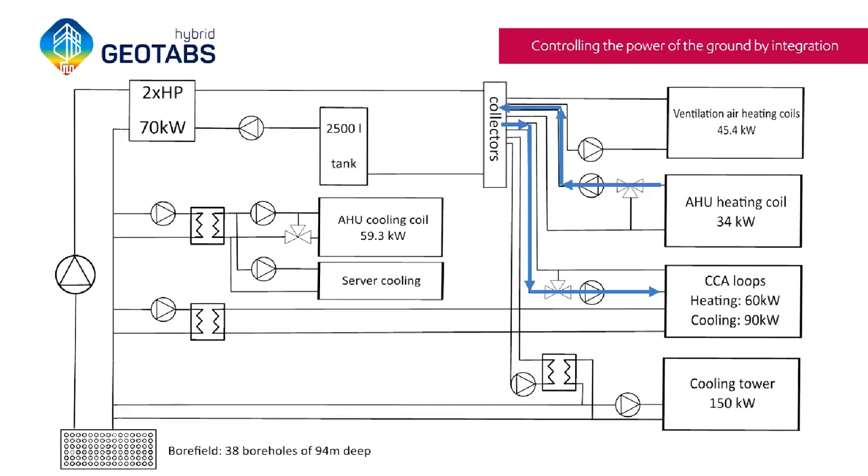Now, I haven't shown any energy savings yet because we haven't gone through the simulation procedure in sufficient detail for me to say, okay, this is how much savings we get. But I did do a study on solar wind in my PhD, where I already mentioned 82% energy savings. So that's essentially this comparison here, and I just want to explain a bit more how we got that energy savings.

I also want to note that it's not something we expect to get for every building, and we do deplete the thermal energy of the bore field. The thermal balance of the bore field essentially is not maintained. We inject 100 megawatt hours of energy and withdraw only 6, while for the rule-based control this was more balanced. So it's not a sustainable solution, and that's something we still have to work on further. But still, this energy saving of 82% clearly shows the potential, and therefore we hope to get around 50 in practice.

So where do we get these actual savings? First thing is that our COP goes up. For the rule-based control, if you compute the COP, it was 4.5, and in the MPC we're getting a COP of 5.5. So that's just by controlling the system more appropriately, such that temperatures go down, you can drive the COP up.

The second thing is that we have much better coordination between ventilation and the concrete core activation. What sometimes happens is that you cool and ventilate at the same time using different systems, and MPC is very well able at doing that, which drives the overall cooling and heating load down. For instance, here you see a reduction of the cooling load from the air handling units by a lot, but that of course shifts towards the bore field, which is then again a problem. But yeah, that's another part of the solution we found.

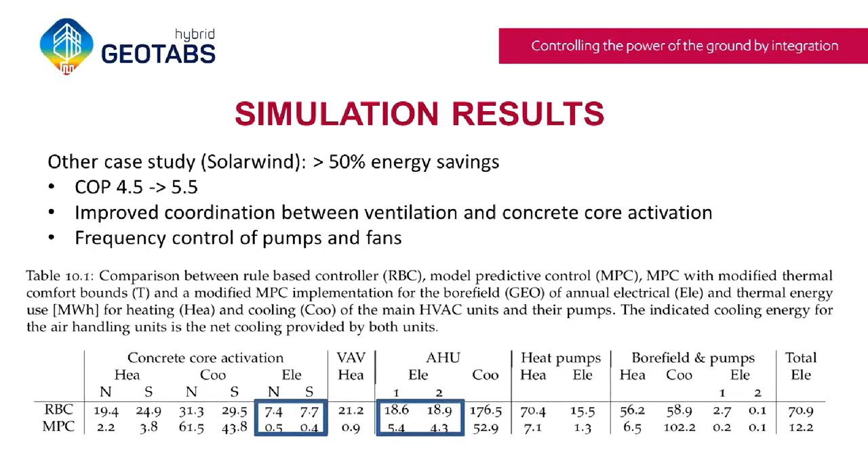And for the air handling units, we also got a strong reduction, which is partly realized by reducing the fan supply pressures at times where we don't need a lot of ventilation.

So I've now come to the last part. The demonstration is something we're actually working on right now. Unfortunately, well, we activated it, let's say, a month ago, but we have had a lot of hiccups, and so at this point something is running, but we're not writing control signals yet. So this is definitely work for the coming weeks.

So just to give you a bit more details on that, for the actual demonstration, we did an implementation of our algorithms on a virtual machine in a Linux environment. This machine can directly write on BACnet. It also has internet access for fetching weather data, and it does periodic downloads every 15 minutes to get new weather forecasts. The idea is that we every second read BACnet measurements and then do a closed loop, for instance, if we have some PID controls for doing the tracking of set points, we operate those at a faster update rate than the weather forecast. So there are separate algorithms.

We foresee having a fallback on RBC, so on the rule-based control. If something goes wrong with the model predictive controller, we want it to jump off automatically, to stop writing on BACnet, and then we can just fall back on the rule-based controller. That's something we do now in this research stage, of course, to not send people home, but I hope at some point that we can just install MPC directly without having this fallback solution.

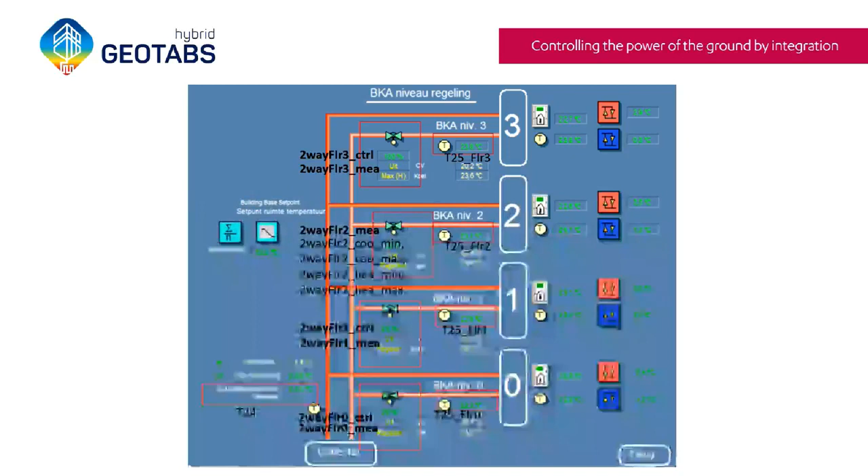Now to give you an idea of what we're actually controlling, we have some figures. So this is an overview of the Priva interface, where we have these 4 two-way valves of the building. Those are valves that we are controlling. This is an overview of one of the floors, where you have the same two-way valve indicated here, but you also have some dampers for which we control the ventilation flow rate.

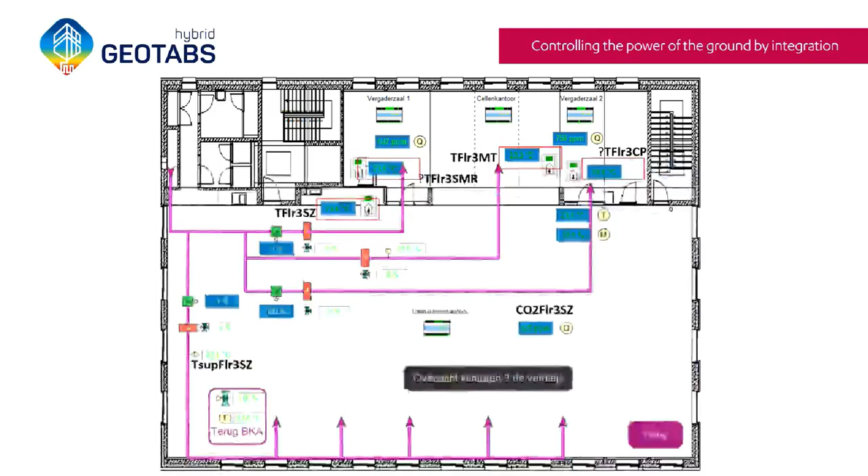There's a damper for each of these 4 different rooms. And if there is a heating coil, for instance, as indicated here, then we can also control the flow rate going to that heating coil.

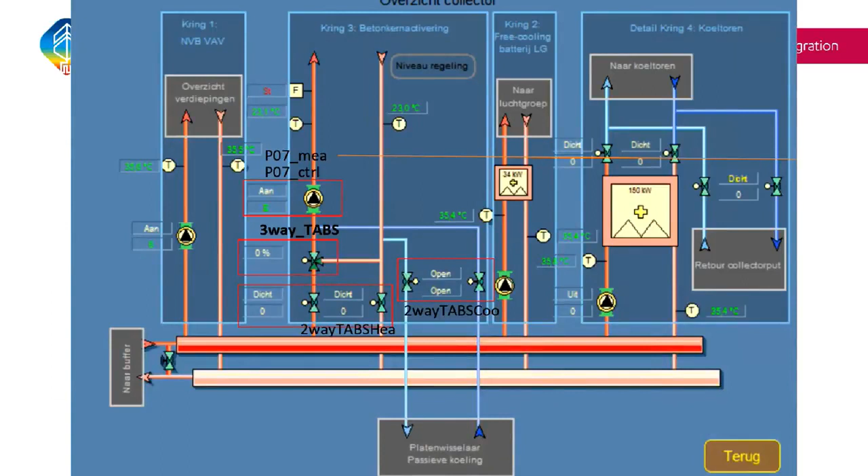This is the collector of the ventilation, the heating system. There are 3-way valves here that control the supply temperature towards the concrete core activation. There's a pump here that we can control. There are 2-way valves that choose between a heating system here and a cooling system. So those we are also controlling.

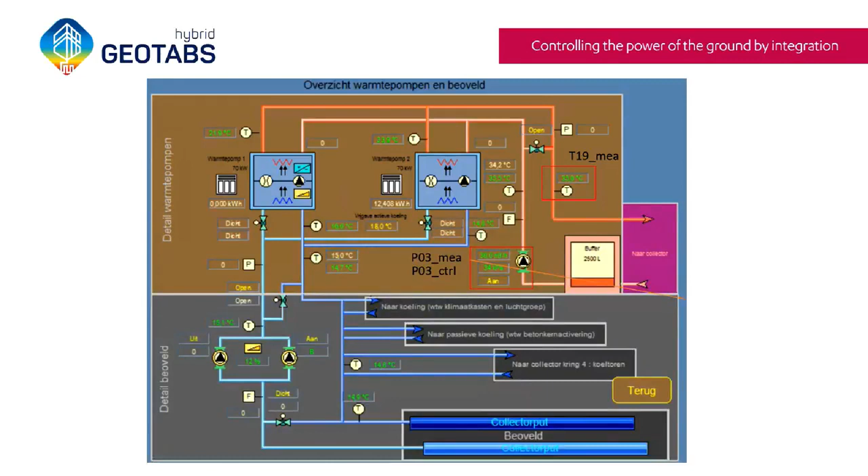And I haven't shown everything yet, but it's just to show that to do such a control, there's quite some things that you need to consider, like redundant pumps, shut-off valves, etc. So these are all things that we have to take into account.

Now to do the actual implementation, this is a bit of an overview of how it works in software and hardware. So the building essentially contains a lot of hardware, which is coupled to these HX controllers of Priva that actually do the analog control signals towards these components. And they are connected together over a BACnet interface. Currently we have this building management system which communicates with these controllers and gives them set points. And what we essentially want to do is hook up into this layer with our computer, so our virtual machine, and to also write on this layer.

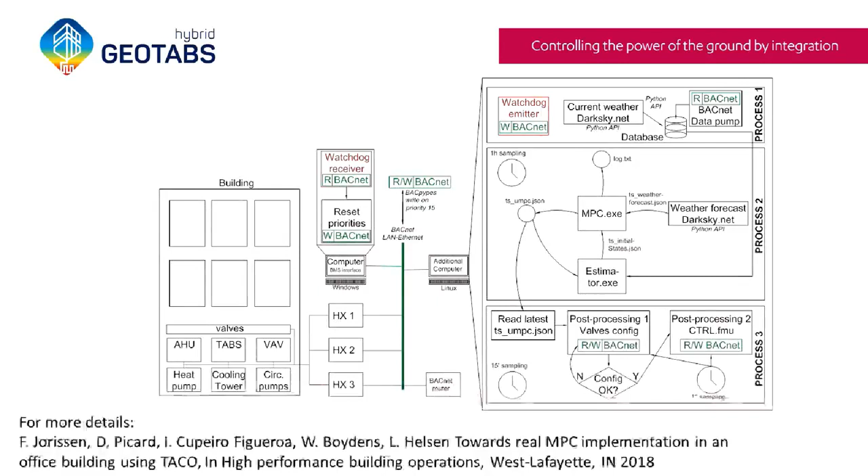And to do the writing, we have essentially got a few scripts. I already mentioned that we have a script for getting weather forecasts. We have a script for checking whether our MPC is running, and if it's not running, to fall back on the existing rule-based controller, so to stop writing on this BACnet layer. Then we have a script that periodically repeats itself, for instance once every hour, that actually computes set points for the various components in the system. And then we have another script that's operated at a faster sampling rate that tracks these set points. And we have some consistency checks, essentially, that first check whether these set points make sense, whether nothing went wrong.

And then if everything is okay, then we can do the actual post-processing.

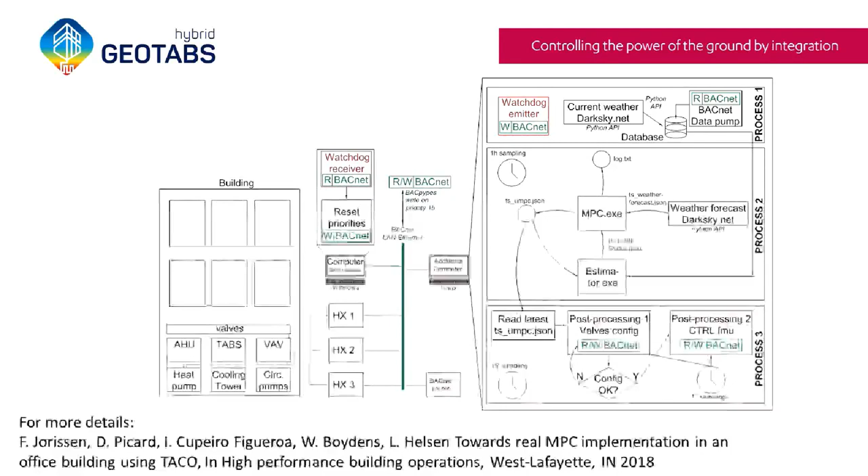Some implementation difficulties that we had so far are as follows. We're installing something in an existing building which is not maintained by us, so we have to get the correct access rights. Also access rights for connecting to the internet even is not that obvious.

And for writing on BACnet, we also had some difficulties with getting sufficient bandwidth. Well, maybe not bandwidth, but there is some delay on the writing, which is something we're still looking at. There were some malfunctioning motors that we figured out at some point that something was wrong, so we had to fix those.

BACnet does not necessarily have unique variable names, so we had to build something on top of the interface to make sure that we're addressing a unique device and things like that.

So as a last slide, to give an overview again: for this practical implementation, we're in the implementation phase. We're not writing yet, but the algorithms are currently running, and we're getting emails all the time when something goes wrong, so it's very exciting. So we definitely know what to do, and the idea is to do a phased implementation where we start with controlling just a few variables to see how everything behaves, and then gradually control the entire building using all the variables that I discussed earlier.

Then we have a second demonstration case called the Potterie, which is an elderly care home in Belgium of 10,000 square meters, where we are currently preparing the model and doing preparations for implementing the controller on site. And for SolarWind, we're still awaiting approval to do the actual control. So that's in a nutshell what we're working on right now.

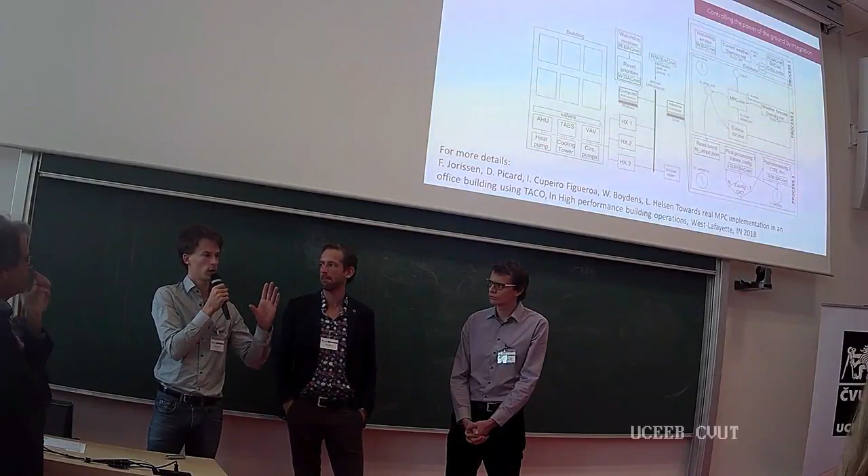Right now we are applying steps of an hour in MPC for Infrax. When we include ventilation and so on, we hope to go down to 15 minutes, but not on a second basis, and there will still be some post-processing necessary. So the guideline is not so much about the convergence of your MPC, it's rather about the time scales in your building and how far it makes sense to optimize—really thinking about time scales.

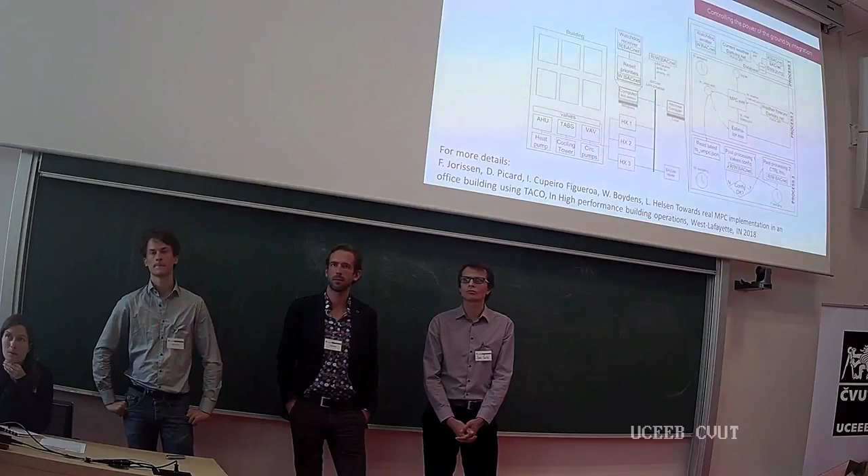Thank you, Damien. I think we'll take the last question from the audience, if that's okay with everybody. Maybe one more, but the last.

My name is Martin Kozek from Vienna University of Technology. First of all, I want to thank you for these very instructive and nice presentations.

I want to add a comment on the problem of switched and continuous control variables, because in our experience it really makes a difference to treat this as an actual mixed-integer optimization problem. If you do post-processing, it's mostly not done in a predictive way, and especially if you have cooling machines or heat pumps, you have a unit commitment problem, and prediction over time is really important. So in our experience, it was important to employ mixed-integer model predictive control for this supply situation.

The second thing is I have a question concerning the white box model, especially the structuring into zones, building zones. What were the criteria for selecting specific zones? Also, is the coupling between the zones considered? And lastly, if you have one large building model with several hundred states and you do one optimization for the MPC, how do the zones come into play? Not specific to one of the buildings, just in general.